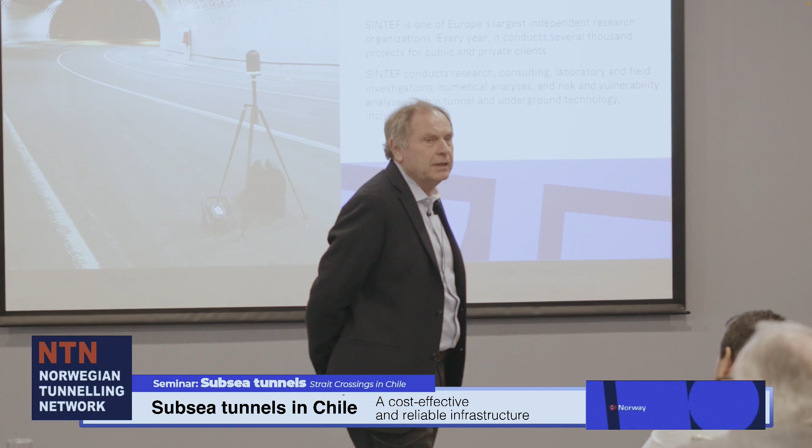Good morning, everybody. Thanks a lot, Matthias. SINTEF is actually a research company, a foundation. It was established 75 years ago, and we are celebrating this event these days. It was established because some professors at the university in Trondheim thought it would be favorable to have a unit only related to applied and industrial research, whilst the university should maintain responsibility for basic research and education. So these two entities have been going in parallel for 75 years.

A lot of people, like myself, have their main position at SINTEF and have had an adjunct professorship at the university. And that goes for a lot of people.

We are about 2,200 people working in SINTEF today, covering basically every topic that you can imagine related to natural sciences.

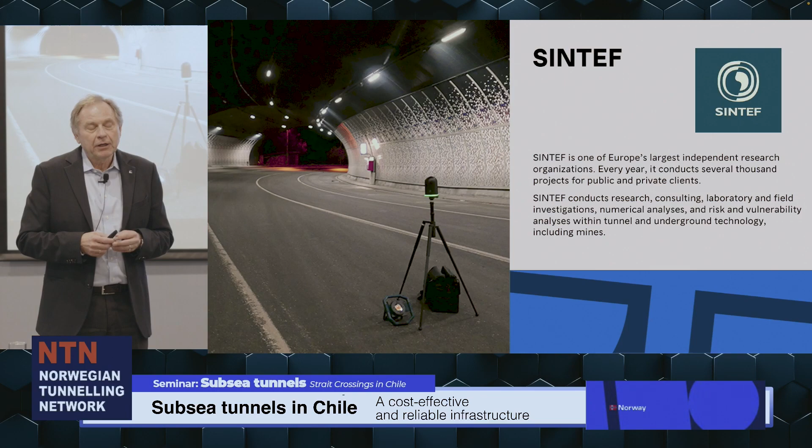But we are not a design company, so our contribution to subsea tunnel projects is through positions as technical advisors to the owners, basically. That is how we have been involved in a number of different subsea road tunnels in Norway as well as globally around the world. So I will come back to that during my presentation.

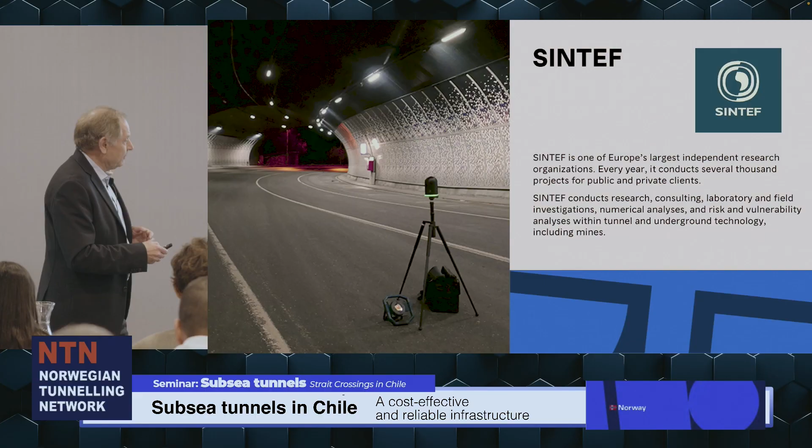I graduated back in 1983, so I have been more than 40 years in this tunneling business. I'm officially retired, but I do these kind of things that we are doing now because I think this is really, really fun.

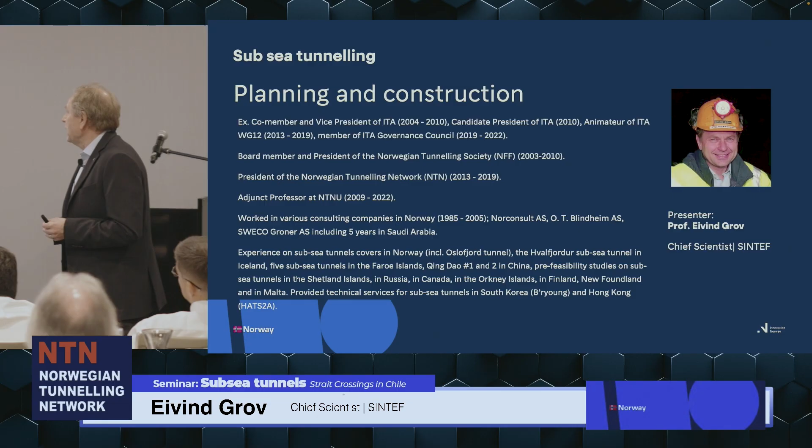I have had a lot of positions within societies like yourself, the Norwegian Tunneling Society. I've been president in that organization. I've also been vice president of the International Tunneling Association, even running for president some time back, but didn't win, unfortunately.

And I've been working with subsea tunnels in a number of different countries. Some have been executed or constructed, and some have been only nice plans for the shelves.

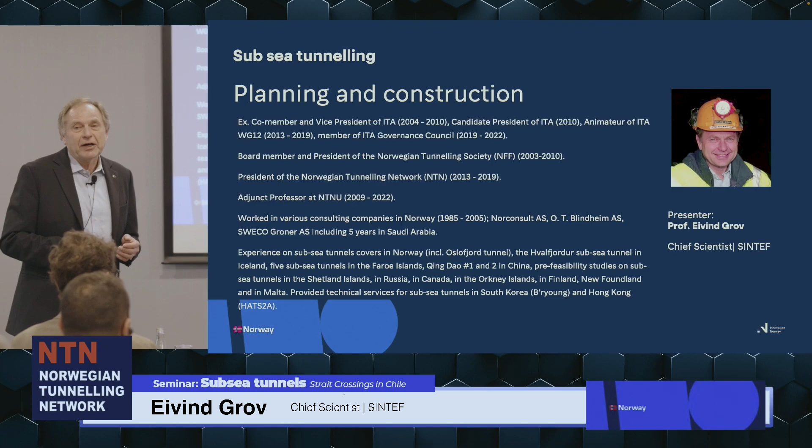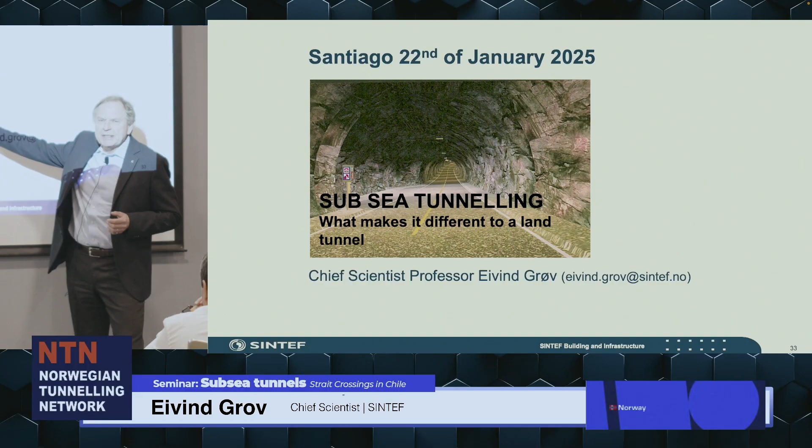So I will talk about subsea tunneling. I will try to focus on what makes this different to an ordinary land tunnel. That is kind of the approach that I'm taking.

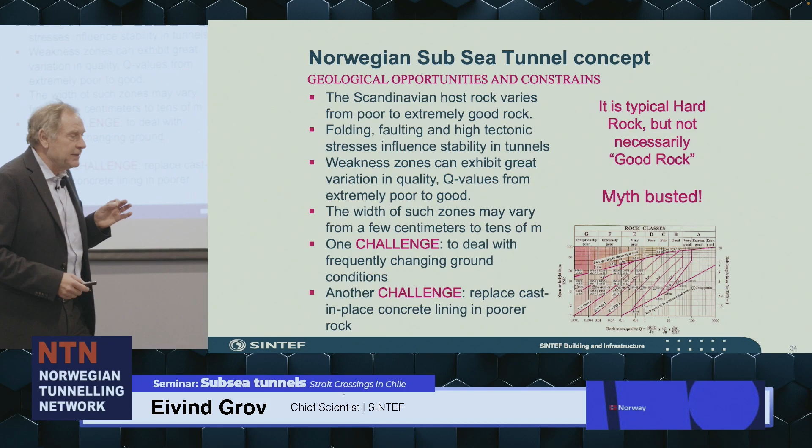But I would like to bust a myth - actually, I could bust two myths. One is that a lot of people tend to believe that Norway is full of money, like Onkel Skrue in Donald Duck - I don't know what you call him in English. But we are not. The second myth is that some people tend to believe that in Norway it's just good rock, excellent rock - you can build whatever you like in caverns and tunnels. That is also a wrong impression.

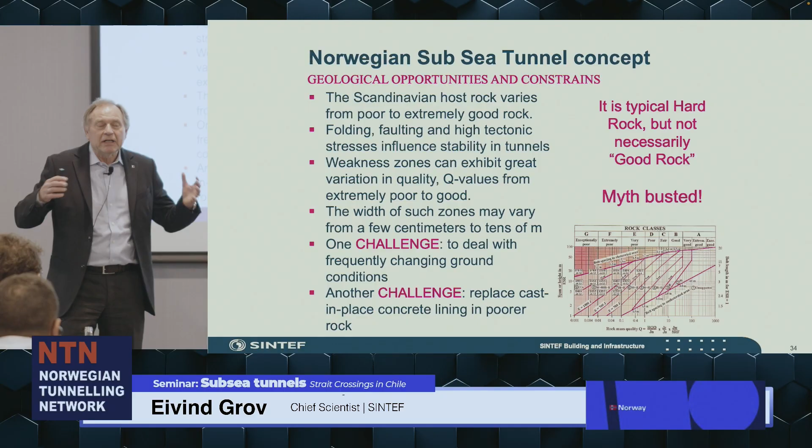We do have good rock, yes we do. We do have hard rock, yes, but we have a lot of mixed rock conditions, which is due to the fact that folding and faulting and high tectonic stresses are influencing what we have as a construction material today.

But we have learned that when we consider the rock mass as a construction material, and we take the benefit out of the excellent properties this material can have, while still being aware that there could be a lot of fault zones, a lot of poor quality rock, and so on - we have something that we can utilize for a number of different applications.

Building large caverns like you saw, the Stad Ship Tunnel, or large caverns like Gjøvik Hall, long tunnels, and so on and so forth. Did I bust that myth? Is that okay with you now? It's not only excellent, fantastic, good rock - it's a lot of different rock mass qualities that we have to face, and we have to face it also when we are going forward with subsea tunnels.

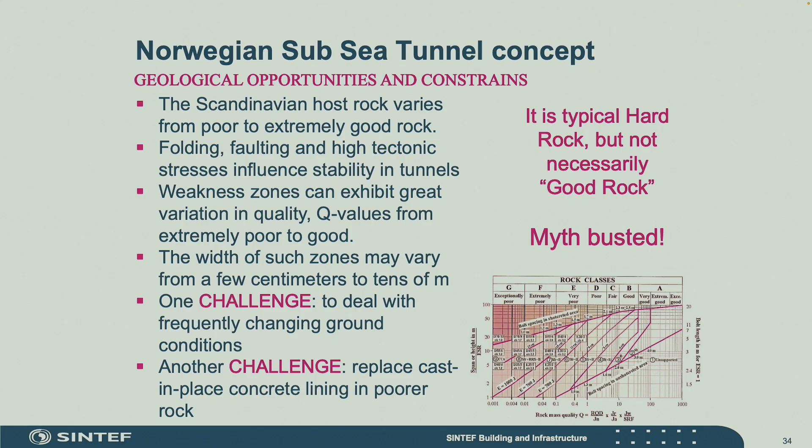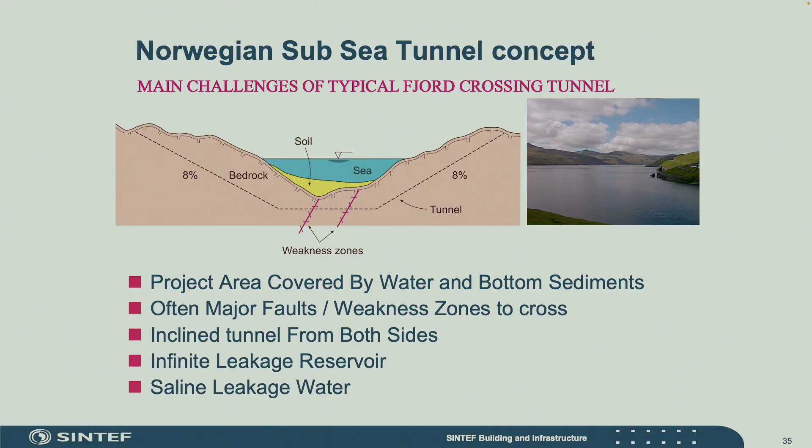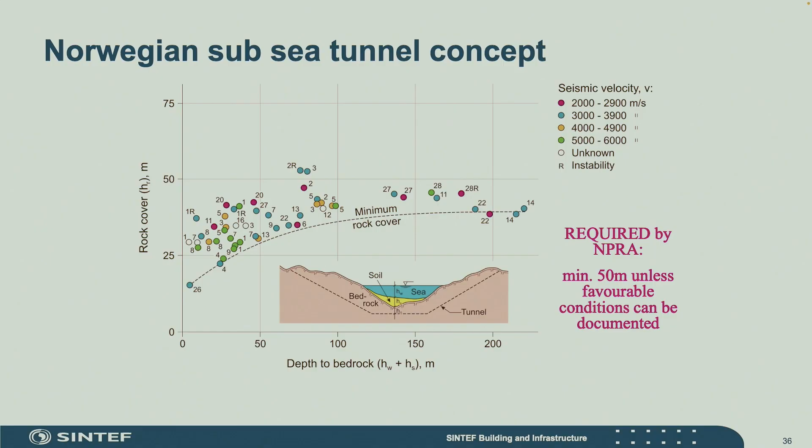Minimum rock cover is a critical factor. We do have to do certain investigations, and many of these are things you know from before, from doing tunnels on land. The main thing is that we have to assess the geological risk, and we will come back to that later on. But we also know from tunneling in general that it is not viable at all to try to minimize or reduce the risk to zero. No matter what kind of tunnel you are building, that is not possible.

That's not viable at all. Then you would have to build one tunnel to investigate for the tunnel you are going to build, where you built the tunnel. And that doesn't really work. This goes, of course, for subsea tunnels also. But what we have to do is be able to identify and manage these risks properly, and that goes even further for subsea tunnels compared to a land tunnel.

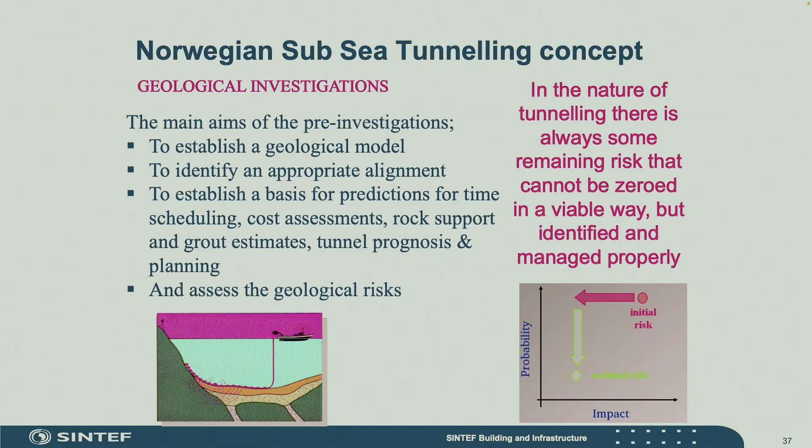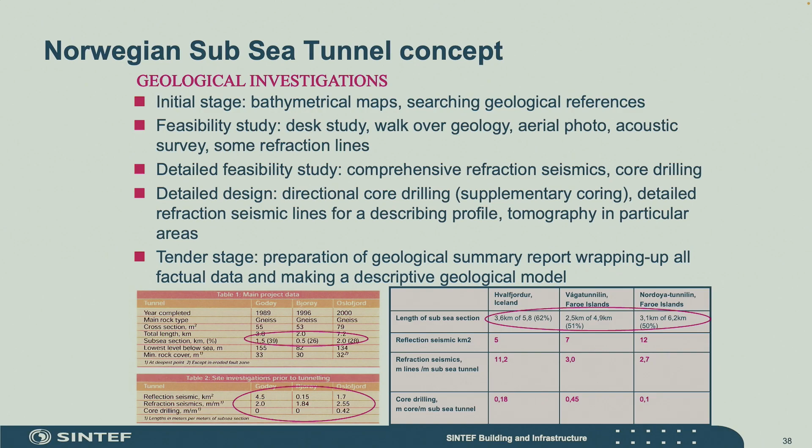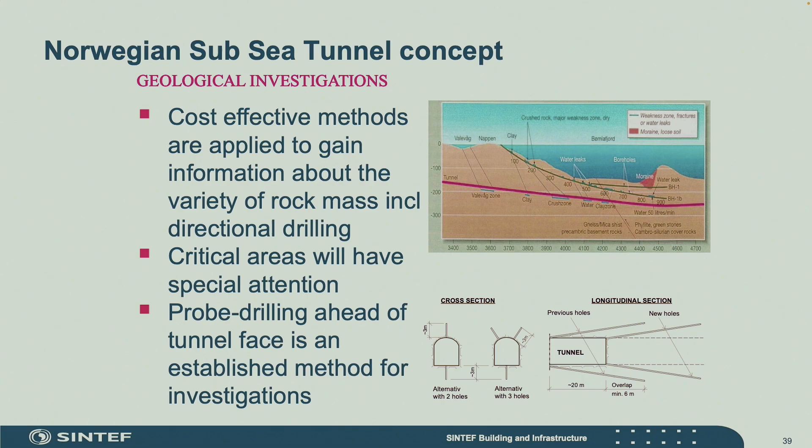This picture is from a project called Bømlafjord, south of Bergen. This is the expected or planned tunnel alignment.

There was an expectation that something could be hiding in this area. So they did a core hole, and what they actually met was some moraine in the core hole. They pulled back the core bit and restarted the core drilling to a lower level, and then they saw that we are lowering the core hole and avoiding this unfortunate situation. The consequence was that the tunnel alignment was also lowered slightly. So that is a way that we are doing directional core drilling, to be sure that we are placing the tunnel at the given level where we are not interfering with weak zones, which could go deep.

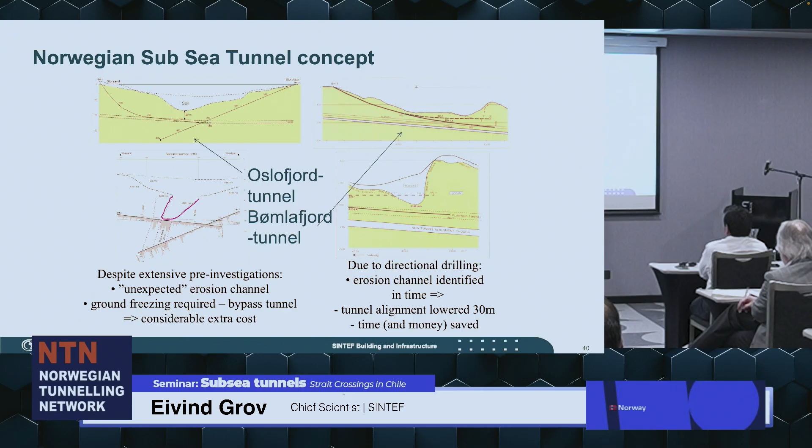There is one picture here from the Oslofjord tunnel. This is actually the reason why we are doing this procedure today. When we were planning the Oslofjord tunnel, we had the tunnel level here, and we had two core drillings. One was directional drilled and one was straight. They were located basically at the level of the planned tunnel.

Unfortunately, in this area the soil was actually going deeper than what we expected. So when they came to this location with the tunnel itself, based on drilling probe holes ahead of the tunnel face, they discovered that it's not rock ahead of us, it's basically soil material. So they stopped the tunnel excavation.

They made a bypass on a deeper level, and then they had to freeze this zone to be able to go through it later on. From that time on, we have always put the directional drill hole below the tunnel level to ensure that we are not repeating that mistake, because that was a costly mistake.

But thanks to the people who were actually doing the probing ahead of the tunnel face, and those who recognized that this was going to be a zone we could not just go through with ordinary excavation, they stopped the construction and decided to do the bypass. If they had just gone into that with an open tunnel face, that could have been a big disaster.

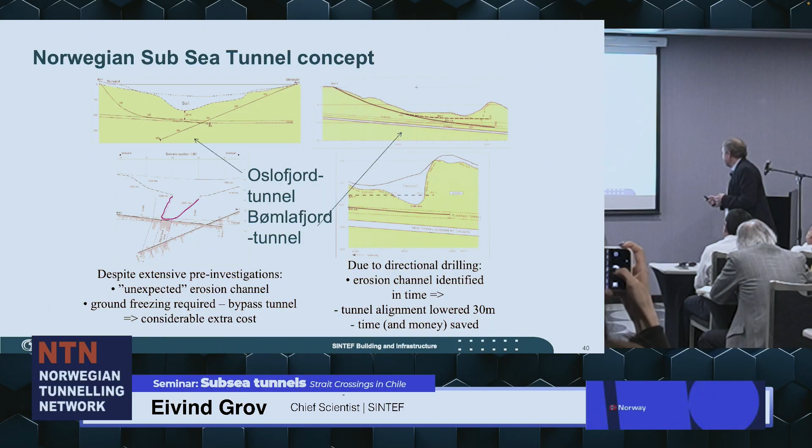We have a risk-sharing principle in Norway, and this also applies to subsea tunnels. It basically means there is a lot of risk on the contractor and a lot of risk on the owner, but it's fair and square shared. The owner carries the risk for the rock mass conditions, because the owner is also the owner of the rock mass, as the owner has decided where we're going to build the tunnel and what pre-investigation methods to use up front. So they have to take this responsibility.

All the information gathered is disclosed to the tendering companies. The contractor has to carry the risk related to whether he is able to do the work within the time, methods, and means expected. He has to have equipment, manning, and has to gear up his site to be able to carry out the work in accordance with what has been given in the tender documents.

We have a beauty in this concept called the equivalent time system, which means that depending on the amount of rock bolts, sprayed concrete, and things like that being done, if it's more than in the contract or the bill of quantities, you will have an extension of time calculated using the standard capacity in the equivalent time system. So that's a time-regulating method.

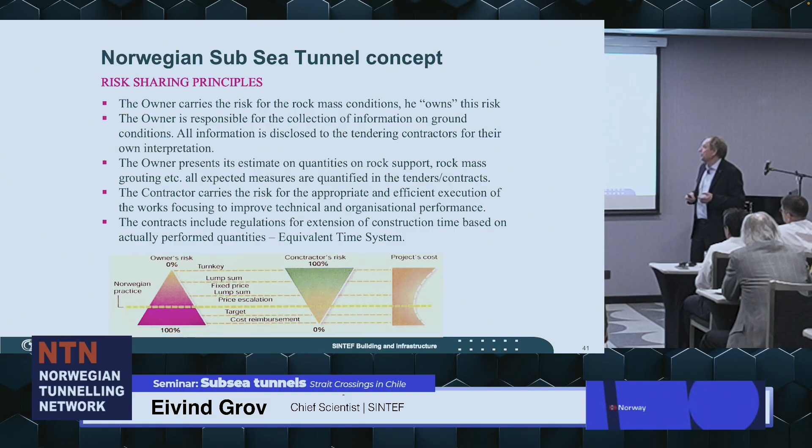Some of the risk with assessing the amount of rock bolt, spray concrete and so on is on the owner itself, because he has to estimate these quantities, and the estimation shall be based on the best knowledge at the time it is being done. So there is no tactic in this, there shall not be any tactics in this.

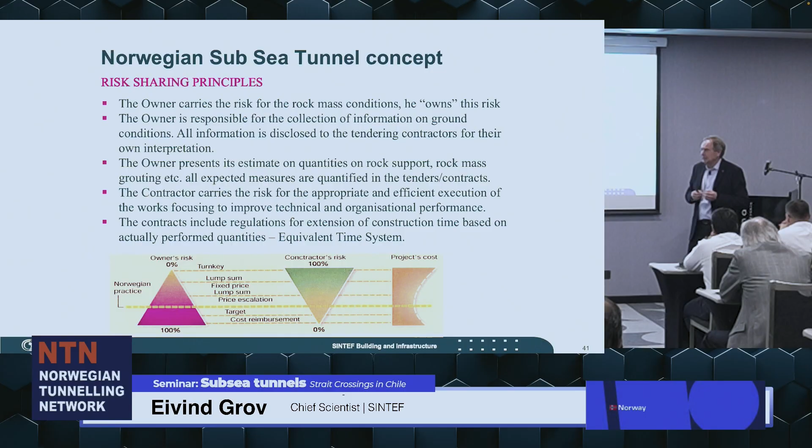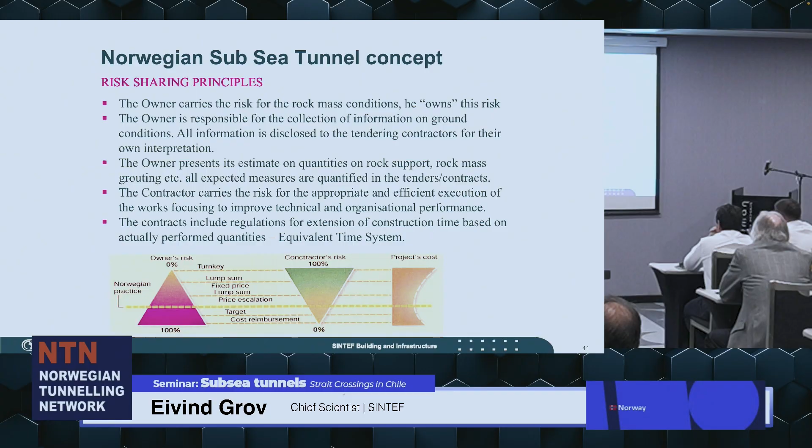With this system we claim that the Norwegian practice will give us an optimum price and a minimum price, maybe you can say. If you have little risk on the owner, or in a turnkey project zero risk on the owner, the contractor has to take the risk, and you have to pay the contractor for taking this risk. On the opposite, if the owner is taking all the risk and nothing on the contractor, it will also give you a high price. So a balance between the risk taking will give you an optimum price.

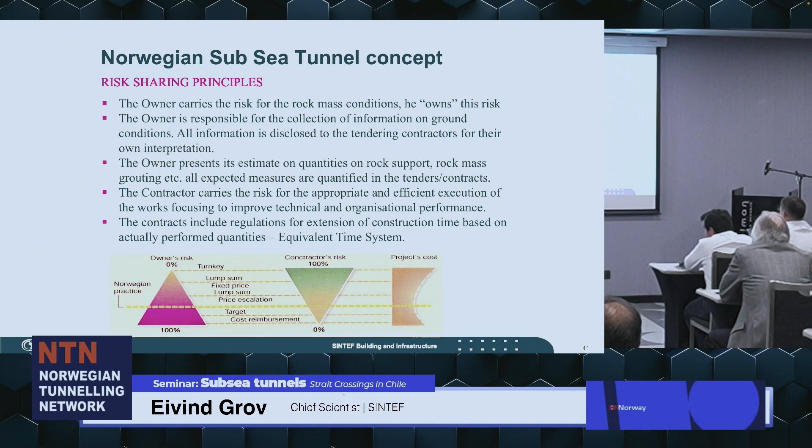It is important that all the expected items are quantified, and quantified in a fair way based on the information the owner has at the time he is making his calculations. The contractor is reimbursed according to the tendered unit price, and these tendered unit prices stay valid throughout the contract period, just being adjusted for inflation.

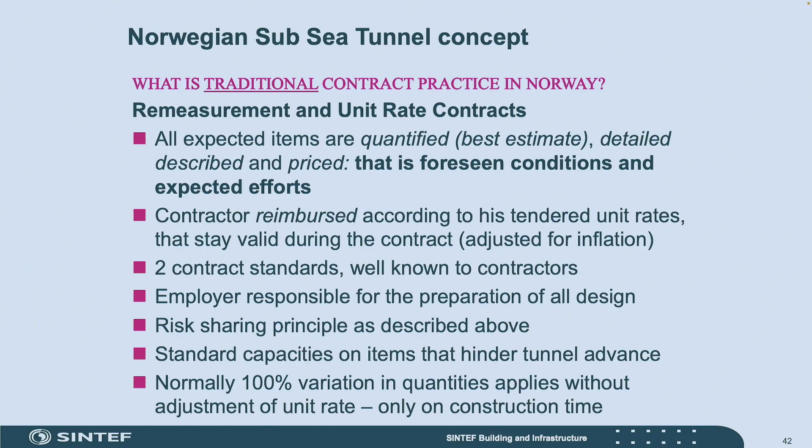I think we have touched base on most of this. We may say that in a tunneling contract we have foreseen geological conditions and expected conditions, and these can be handled by the means and measures that are in the contract itself. If truly unforeseen conditions occur, then we are in a different sphere, because if they occur, the unit rate contract does not provide a magical solution to it.

But a fixed price contract does not provide a magical solution either. In that case, the success of the contract will only depend on how good the two parties are in negotiating a fair and square solution for the problem.

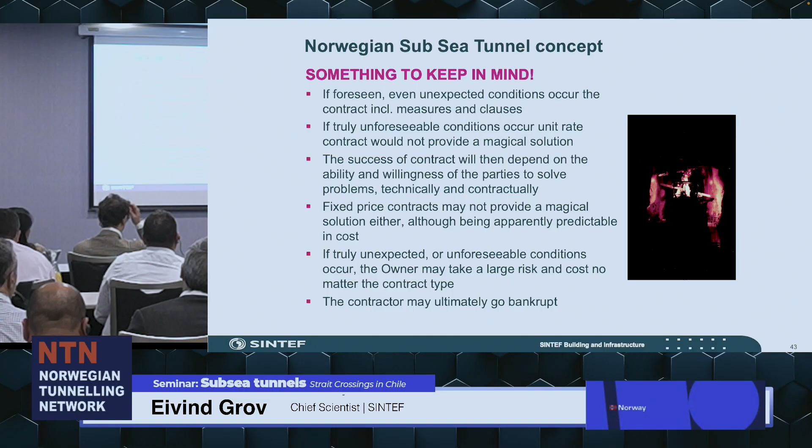The owner in this kind of situation may take a high risk, because playing the game too hard could lead to the contractor ultimately going bankrupt, and then the owner is taking over the whole responsibility and the whole risk of the situation. That's not a good situation either. So it's important that we are able to share the risk between the parties in a fair and square way.

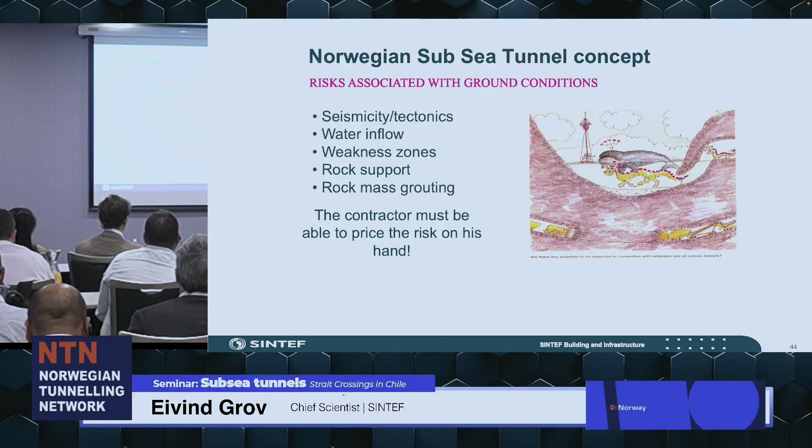When it comes to risks associated with ground conditions, seismicity and tectonics have been mentioned already. We have water inflow, weakness zones, rock support, rock mass grouting. The most important thing is that whenever we present a tender document in the tendering phase, the contractor must be able to price the risk which is on his hand.

We should not put it into a wrapping or disguise the risks, because that will ultimately lead to a situation where the contractor is not able to price the risk.

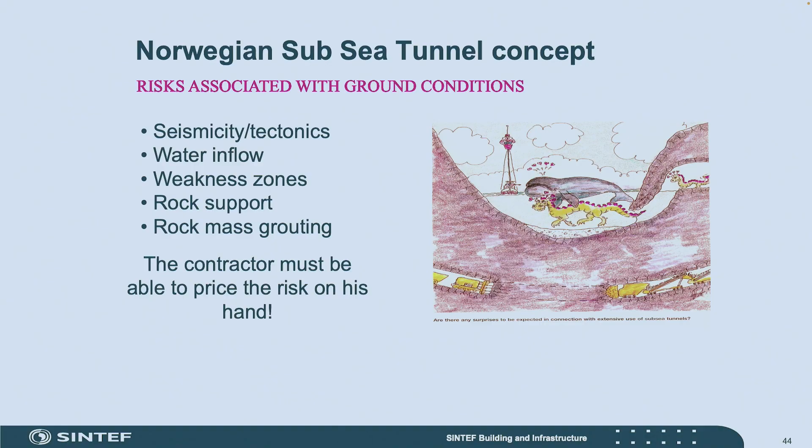We have had some situations where things didn't go exactly as we wanted. One of them is a tunnel called Ellingsøy Tunnel, going back to the late 80s. In this location we had a rock cover of 45 meters, a water depth of approximately 70 meters, and we encountered a fault zone with clay and lots of seepage.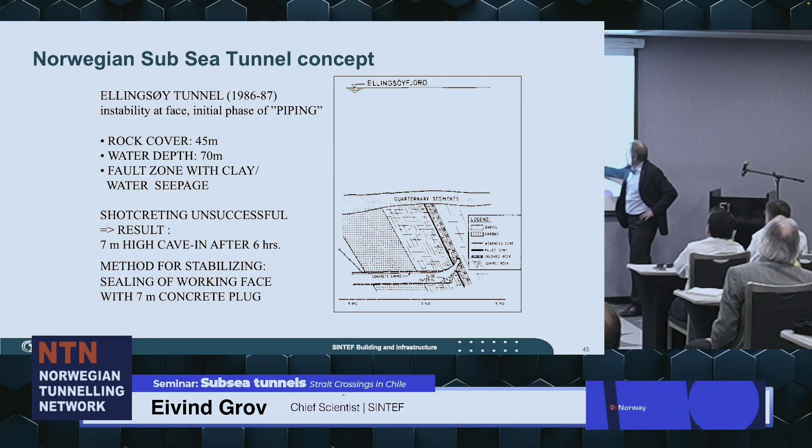So what happened was that piping actually developed, and this was approximately a 7 meter high cave-in after 6 hours.

What had to be done was to try to stabilize. We had to seal off the working face and place a concrete plug at the face itself to stabilize it. And then, once the face was stabilized, we had to do preventive measures, with spiling and things like that, to be able to go through this.

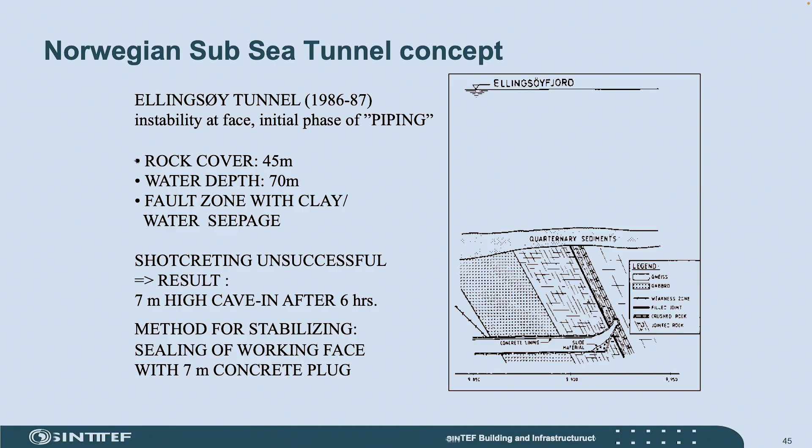This was actually the first fixed price subsea tunnel project ever being built in Norway. Skanska, or Selmer as it was called at that time, was very eager to do this. It's not a very long tunnel, but what they encountered in this particular project was a fault zone with sandy material.

Very high permeability.

And what they had to do was a lot of comprehensive grouting. They even used tube á manchette to be able to actually grout some of the material in front of the tunnel. Spiling bolts, rock bolts, shotcrete, and going through the secured zone with reduced blast lengths to be able to do it. And they had to use shotcrete arches, or what we call today reinforced shotcrete ribs, which you can find in the Q system, for example.

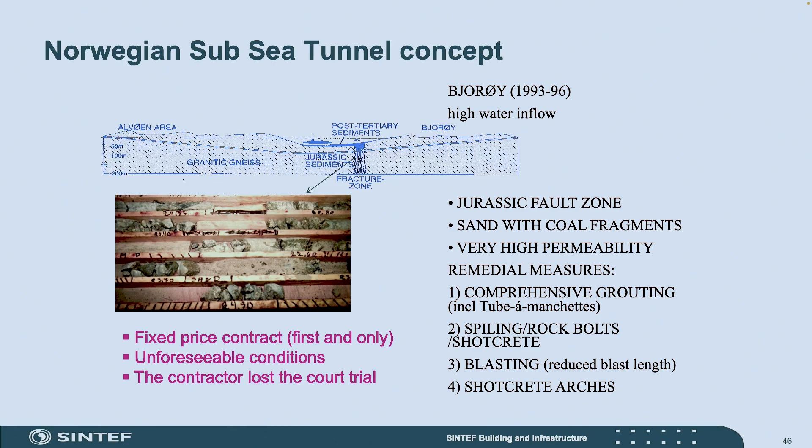Another one was more recent. This is the Atlanterhavs tunnel. They were almost at the deepest point in the tunnel, almost reaching down to the bottom. Then they entered into a fault zone. High water inflow, high pressure, you can see. Now, there is no... it's 230 meters below sea level. 230 meters, theoretically, waterhead in that location.

So they had a face collapse. They had to cast a concrete plug. You can see the rock bolts here from the instability. So they had to block off that face, cast a concrete plug, and then start again to do short rounds with extensive rock support when moving forward. This took considerably a lot of time, one year to actually get through that location totally.

But insofar, we have always been able to mitigate the situation and to complete the tunnel construction to a final tunnel. We have never ever abandoned any of these subsea tunnels in Norway.

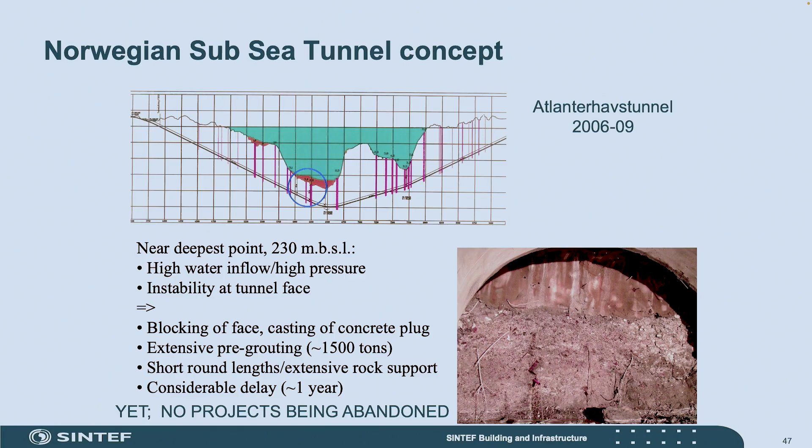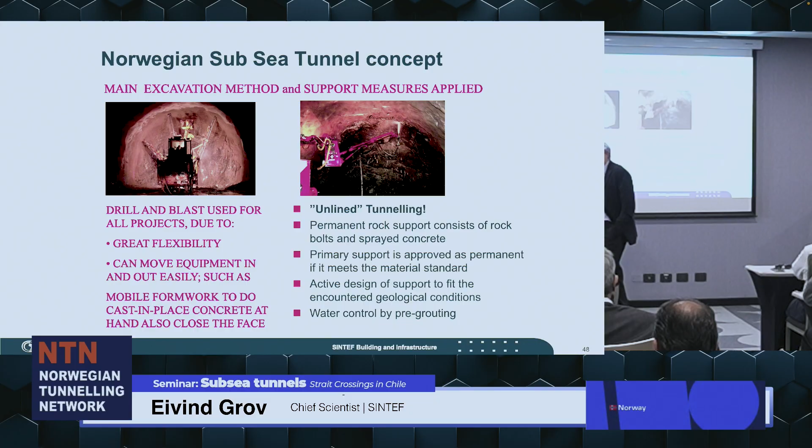We have always been using drill and blast. For the Rogfast project, we made a study where we tried to convince the owner that he should look at the possibility of doing the tunnel with a TBM, because we were thinking that a TBM with EPB facilities or double shield and things like that could be a possible solution, but that was abandoned. And that is the only project where a TBM has been looked at.

And the reason why we are sort of hanging on with this drill and blast method is that it provides a great deal of flexibility. We have the possibility to go in with other equipment, other types of equipment, and the fact that at the site we shall always have a mobile formwork to do cast-in-place concrete as a measure if things go wrong. And if you have a TBM, that may be a problem to do so. So that's why we basically have used the drill and blast method.

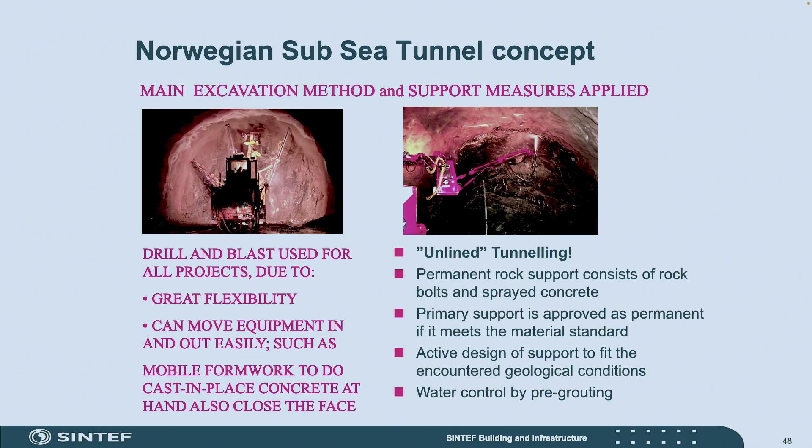I'll skip this, it's a little bit old, but we are basically using ordinary rock bolts and sprayed concrete as rock support. Today, there are regulations in the handbook or guidelines from the Public Roads Administration on the minimum thickness and things like that, but this is basically what we are using. Only on rare occasions has there been a need of cast-in-place concrete lining.

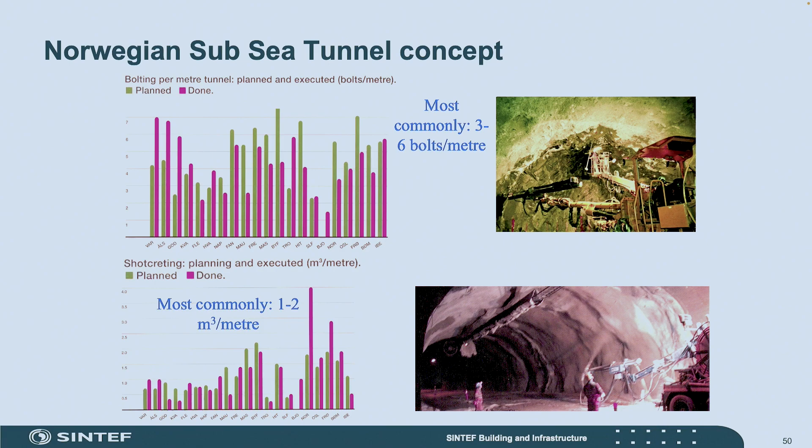Oh shit, wrong direction.

As I said, water inflow is a risk element in subsea tunnels. There is a maximum requirement on inflow, which is today 30 liters per minute per 100 meters. And that is also the dimensioning criteria for the pump and the pumping system and the drainage system in the tunnel.

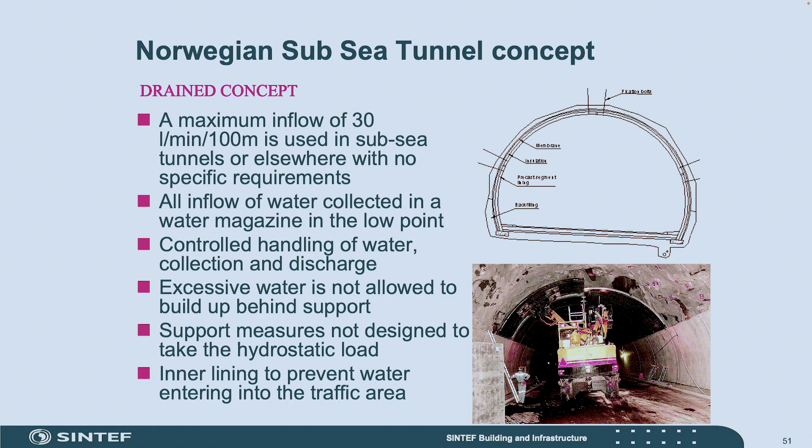Because in both land tunnels and subsea tunnels in Norway, we actually allow water to enter the tunnel, but we take the water out in a controlled manner. And for a subsea tunnel, which has a low point, it means that all the water which goes in has to end up at the low point, and at the low point, we will have a pumping station and a water magazine.

This is kind of a rather large construction element in the tunnel itself. It should be able to store water for either 24 hours or 48 hours of steady inflow of 30 liters per minute - not over the total length, how to explain that - 30 liters per minute per 100 meters for all the meters on both sides of the pumping sump.

So in case of an electrical failure, so that these pumps which are sitting here fall out of operation, the water magazine shall be able to cater for the inflow in 24 hours or 48 hours. And that is sometimes a quite considerable amount of water.

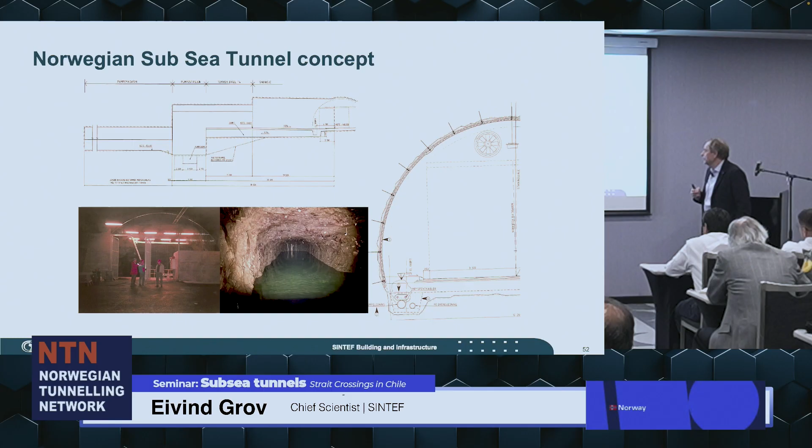From this pumping sump, it will be pumped to one of the sides for deployment, but there is a redundancy, which means that the pumping system should also be able to pump to the other side in case there is something wrong. So there is a redundancy in the system when it comes to the pumping, because this is really crucial for the operation of the tunnel itself.

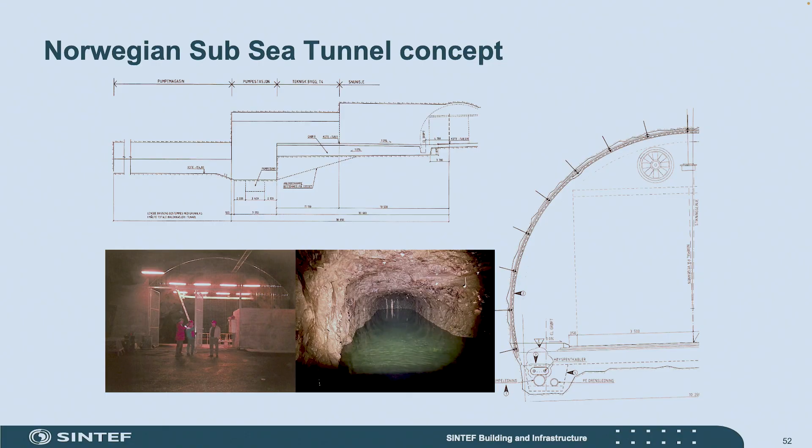We rely heavily on what we call pre-excavation grouting, or pre-grouting. That is something which is mandatory to have established for a subsea tunnel. We do it also for ordinary land tunnels, but for a subsea tunnel it's even more restrictive to have this in place.

In many places around the world, people talk about post-grouting. We have abandoned that idea. We say that rock mass grouting shall be done as pre-excavation grouting.

And in a subsea tunnel, it's mandatory to have a system for probe drilling ahead of the tunnel face. Probe drilling ahead of the tunnel face would delay the excavation process slightly, but that is the first-hand information that we will have when we are doing the excavation work or construction works. Leaving that out is like lowering your guard totally.

The probe drilling is something that we, if we expect good rock mass conditions, can go down to 2 or 3 or 4 or 5 holes in the probe drilling. If we do expect adverse ground conditions, we will increase the number, and we will decrease the length between each probe drilling round.

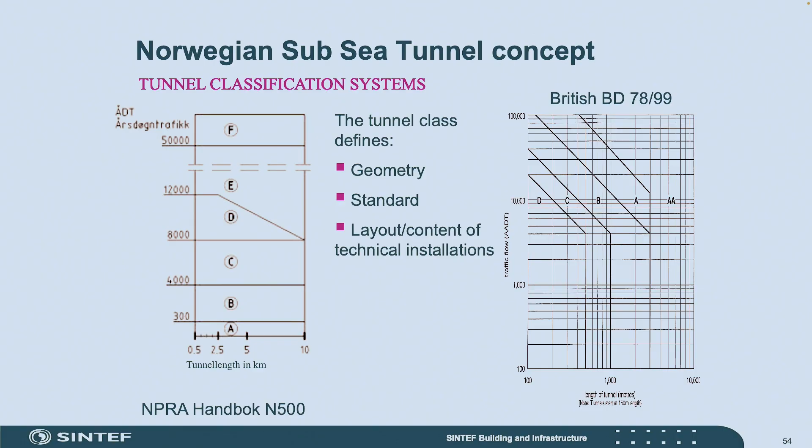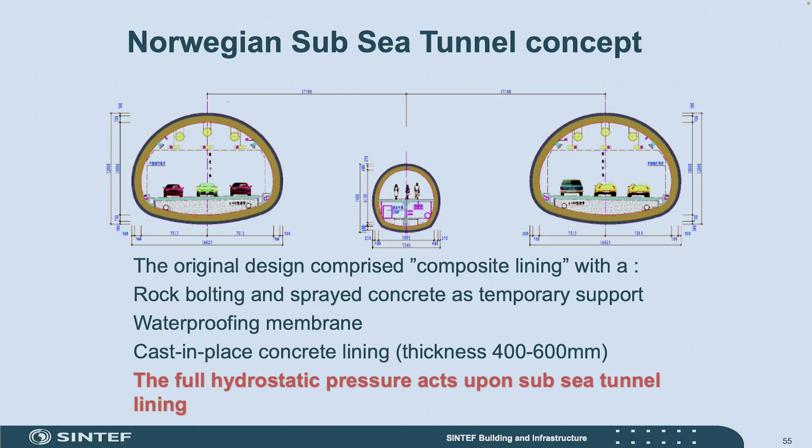So exporting subsea tunnel concepts is interesting. Some years ago, we were in Qingdao in China, and they had established this type of system: 2 main tunnels and a service tunnel, being excavated using ordinary drill and blast in rock mass ground conditions not far away from what we are used to in Norway. But they have a thick cast-in-place concrete lining for all 3 parallel tunnels, and we tried as best as we could to convince them that this is not necessarily best for a safe tunnel excavation and operation.

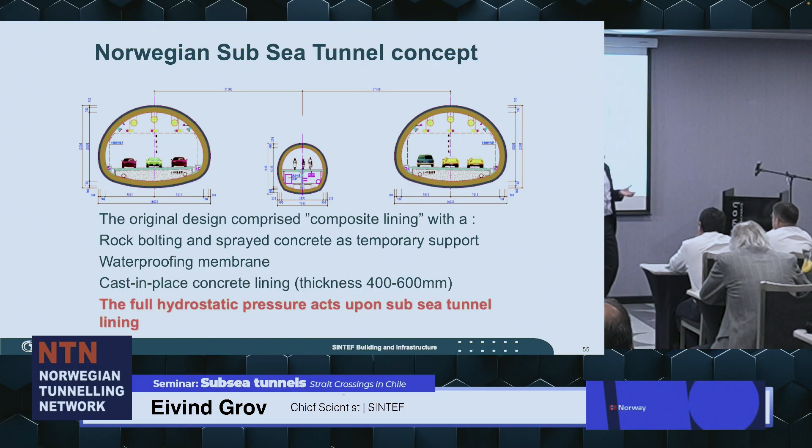Because what you actually do is you increase the loading on these structures. So the tunnel has to be designed with full hydrostatic pressure acting on these structures. So we suggested, and we did a lot of numerical models, referring to experience in Norway and so on and so forth.

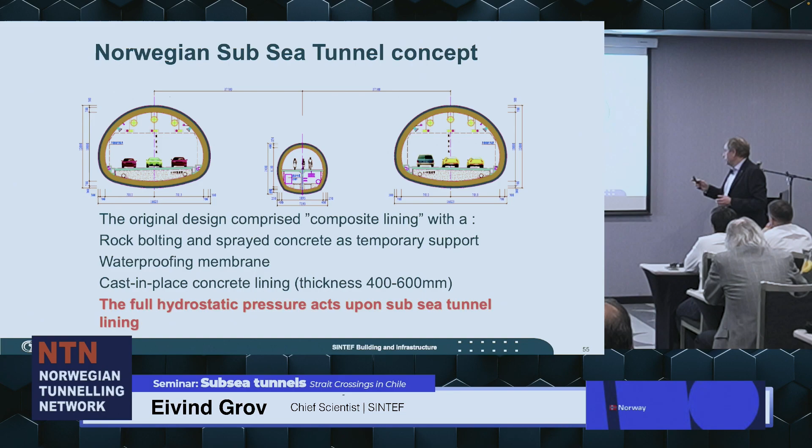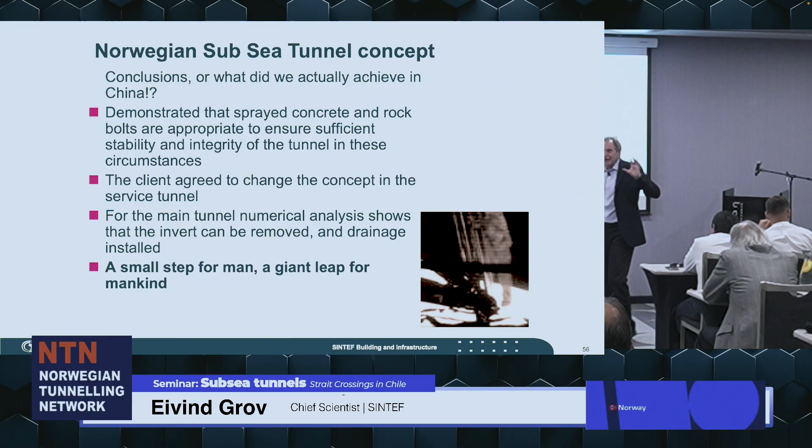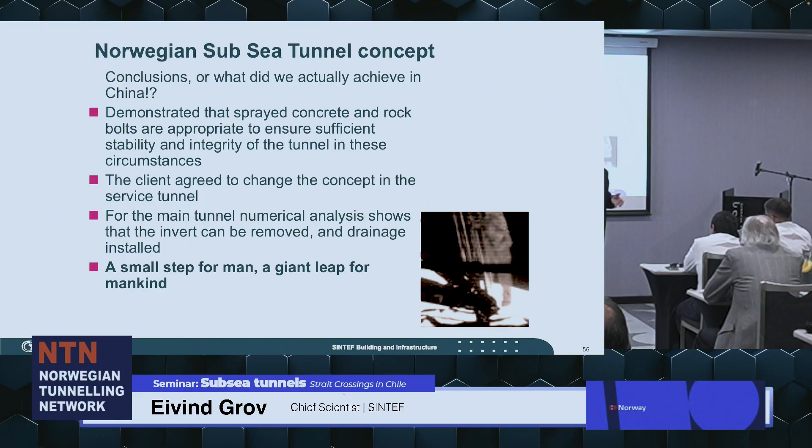What was the outcome? We were able to take away, they were listening to us, they took away the lining for the central small tunnel, and kept it for the big tunnels on the side. We didn't really win the game, but at least we managed to do something. I call it a small step for man, a giant leap for mankind. So there's hope to be even stronger in trying to convince people that we have the possibility to do this in a much more, let's say, cost-effective way than many do.

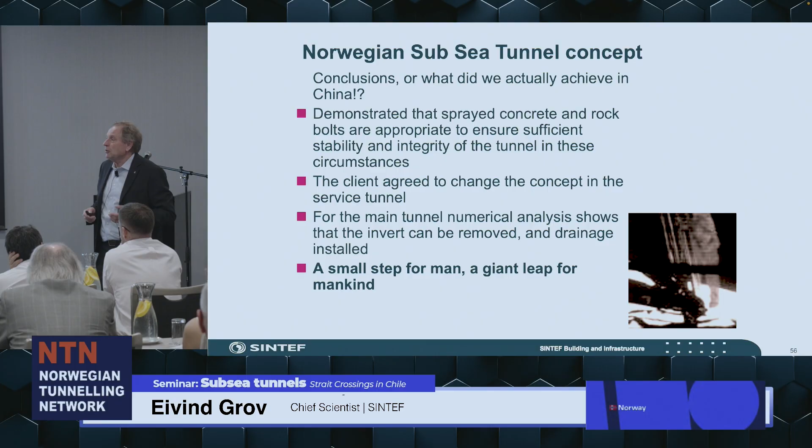So if we go to some locations outside of Norway, since Arild Petter is very focused on the west coast of Norway, where he is living, I'm focusing very much on Trondheim, where I'm living. In Reykjavik, which is almost at the same latitude as Trondheim, we were involved in a subsea tunnel some years ago, the Hvalfjordur tunnel. I'll show you some pictures from it.

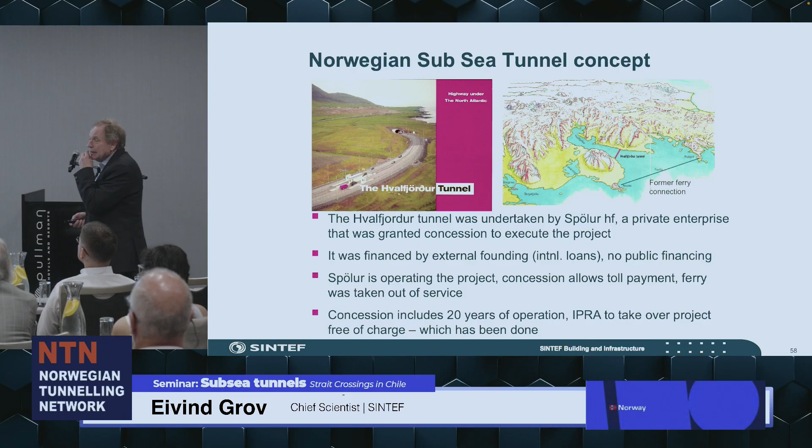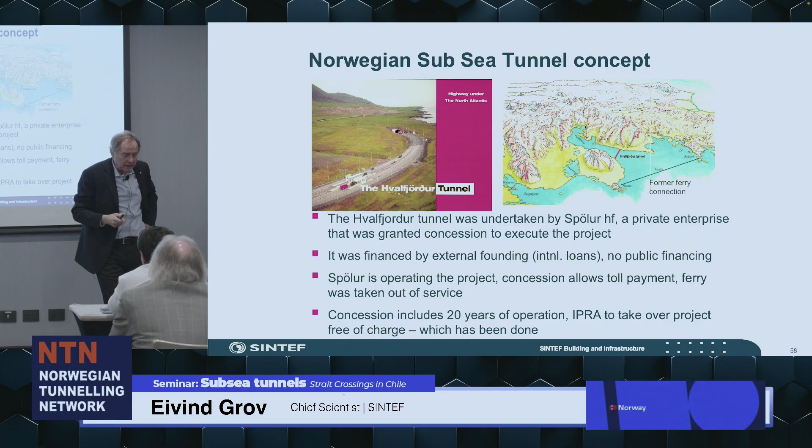The Hvalfjordur tunnel is located outside Reykjavik. This is Reykjavik, and here is the Hvalfjordur tunnel. This used to be a ferry connection, and you could also go around the fjord, but this tunnel would cut the distance for all the facilities on the western part of Iceland.

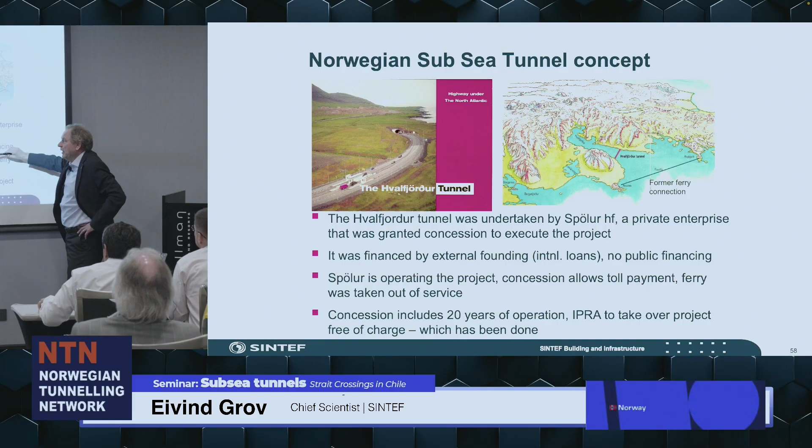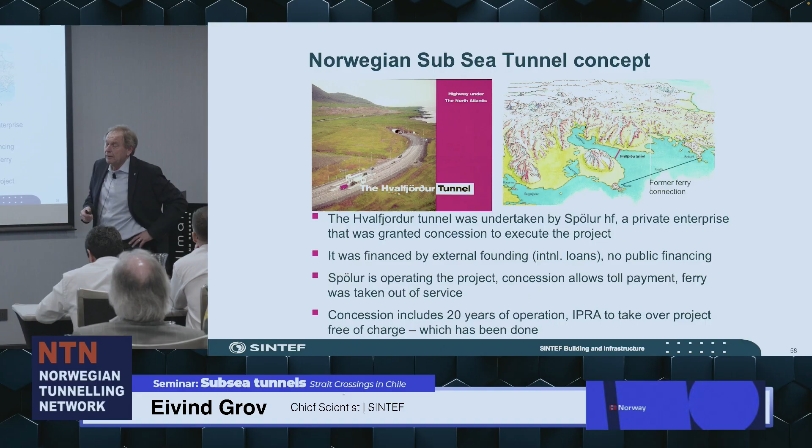The tunnel was undertaken by a private company, a private enterprise. It was financed by external funding, no public financing whatsoever, and Spölur operated the tunnel for 20 years. Today it's operated by the Public Roads Administration in Iceland.

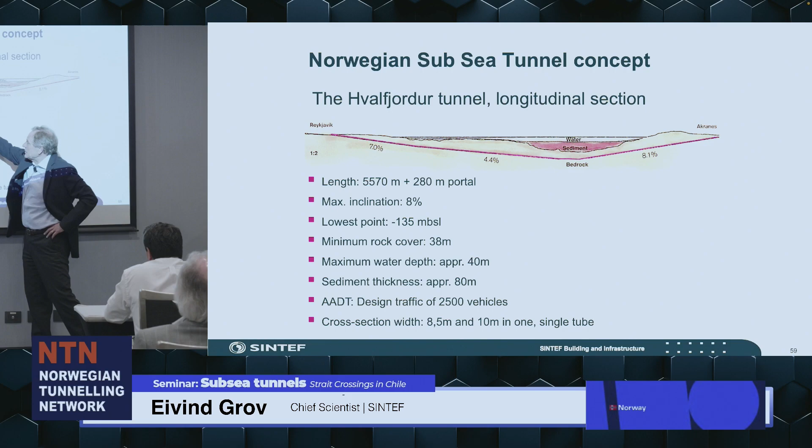This is the longitudinal section of the tunnel. You can see we had an inclination of 8% here, which would not have been allowed today. It's almost 6 kilometers of length. We have a minimum rock cover of 38 meters and 40 meters waterhead here.

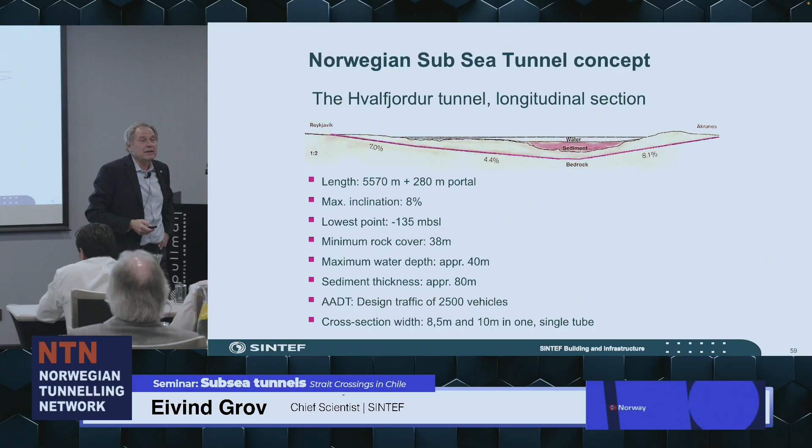The interesting thing, for those of you who know Iceland, we were talking about seismicity. This is a location where seismic events take place. I'm not saying daily, but very, very often, very frequent. We know that Iceland is cut by the Mid-Atlantic Ridge, and Iceland is still growing because of the rift activity.

The project site is located some 10 to 40 kilometers west of the so-called Reykjanes volcanic zone. So it's quite active, and you have probably seen news flashes from Iceland where you see volcanics flowing on the surface of the country. This is actually prone to active seismic activities.

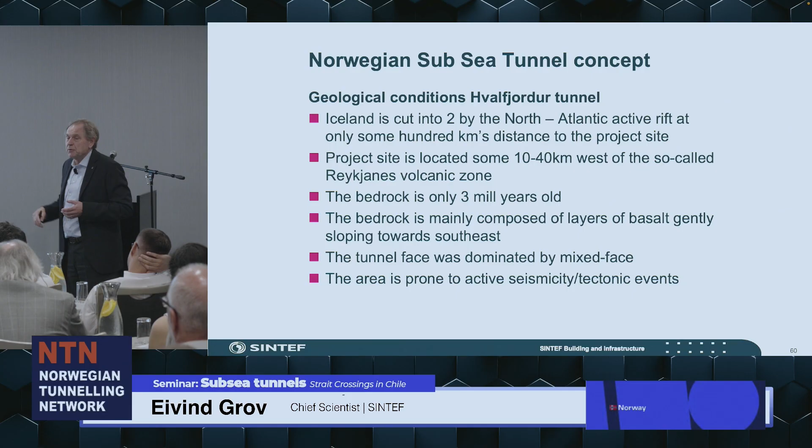We did a risk analysis before the construction work started, looking at all sorts of events: 50 years, 100 years, 1,000 years, 5,000 years return period. We ended up with the conclusion that we should design for the 50-year seismic event. That is something we had the possibility to cope with. If you go further to 1,000 or 5,000 years, you have to do things that are not viable for a tunnel project.

In Iceland, the media was on top of us. They called it an engineering fiasco before we even started. That's not very nice to do, to call a project an engineering fiasco.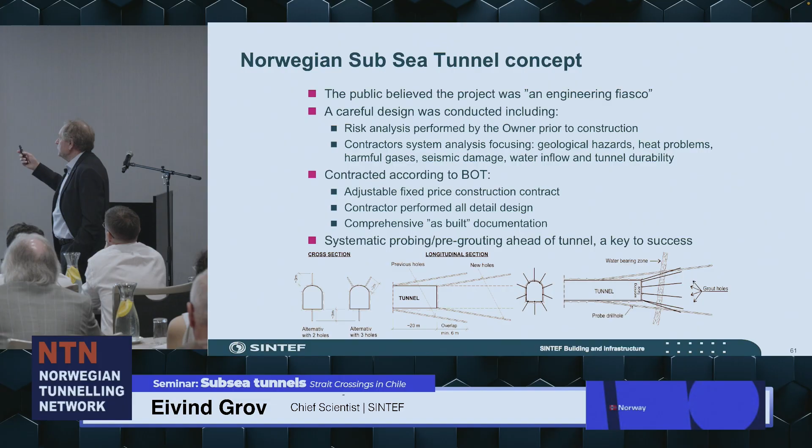As I said, we did a whole lot of risk analysis and things like that. We engaged the contractor on an ordinary build, operate and transfer basis, with an operate and transfer period after 5 years. We used an adjustable fixed price construction contract. The contractor performed all detailed design and comprehensive as-built documentation. What actually came out of that was that it was done in 2 years and 3-4 months, half a year shorter than expected.

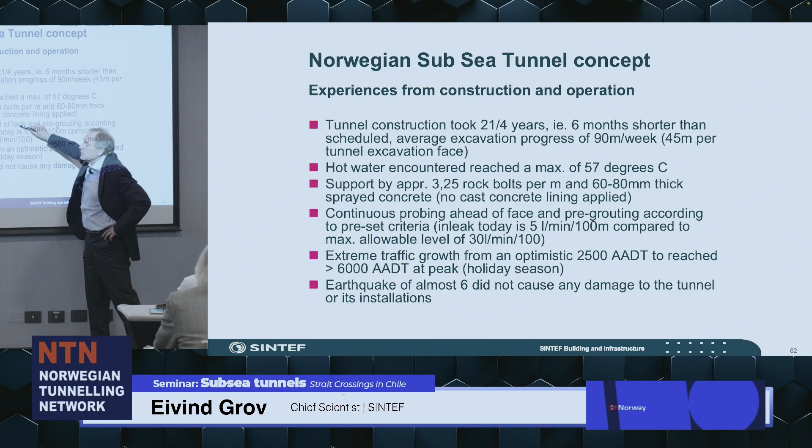We encountered water that reached a temperature of almost 60 degrees Celsius. 60 degrees Celsius with lots of concrete is a challenge. It was supported with ordinary rock bolts and sprayed concrete. The main thing here is also continuous probing ahead of the tunnel face, always.

It was designed for an optimistic 2,500 annual average daily traffic. At the peak, we had more than 6,000 vehicles through that tunnel. The tunnel, which was considered to be an engineering fiasco, was paid back in half the expected time, or something like that.

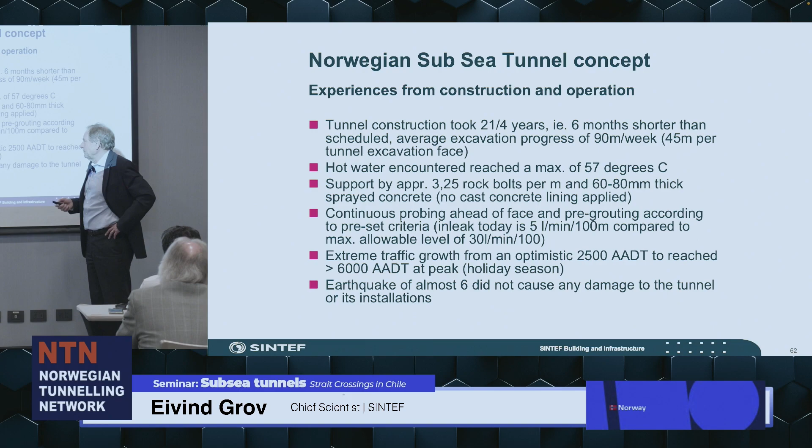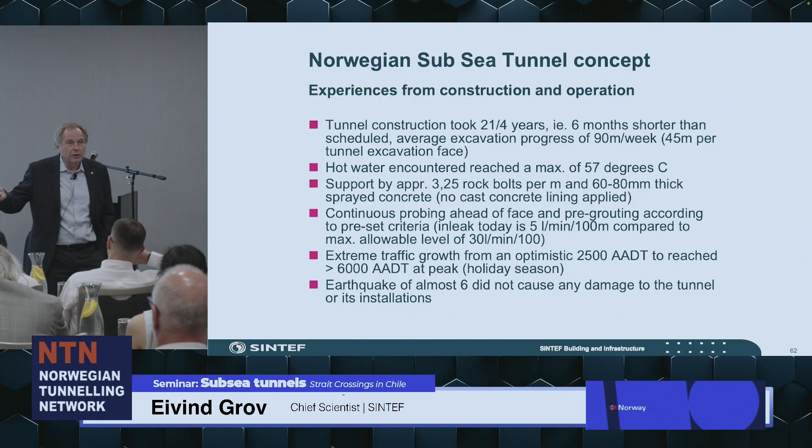We had on one side of the tunnel a station that is actually measuring seismic events. One earthquake reached almost 6 on the Richter scale, and there was no harm to the tunnel. People who were in their cars during the event didn't even notice that an earthquake had taken place.

They were asked, well, did you notice that there was an earthquake? An earthquake? No, not at all. And there was no damage to any of the installations in the project.

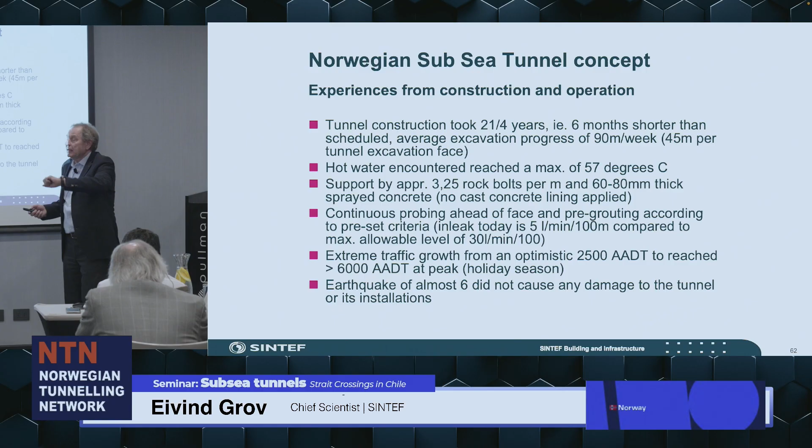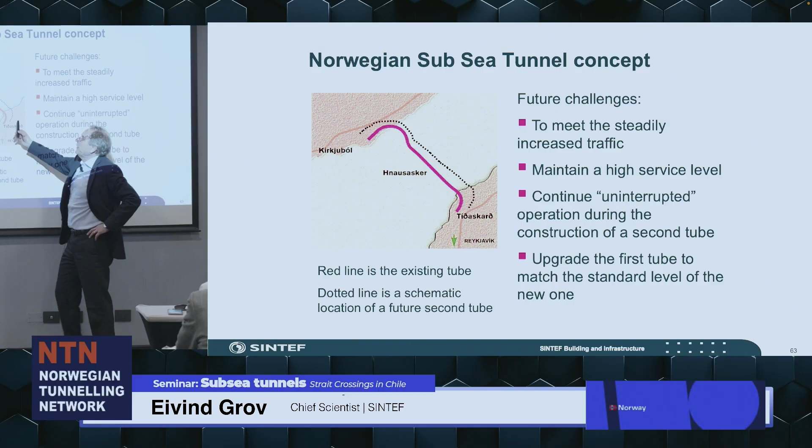Now I'm running a little bit out of time, but this has continued to meet the requirements of the society in Iceland. Now they're looking at making a second tube because the traffic density has increased so significantly.

Then we go to the Faroe Islands. The Faroe Islands is a group of around 20 islands. They used to be connected with ferries between the islands, and people used to spend a day or two when they went visiting friends in the upper part if they lived down in the southern part.

That means that people who are living down here will go the whole way up to the northeast in a couple of hours. That used to take a couple of days earlier with ferries and things like that. So this is an infrastructure revolution.

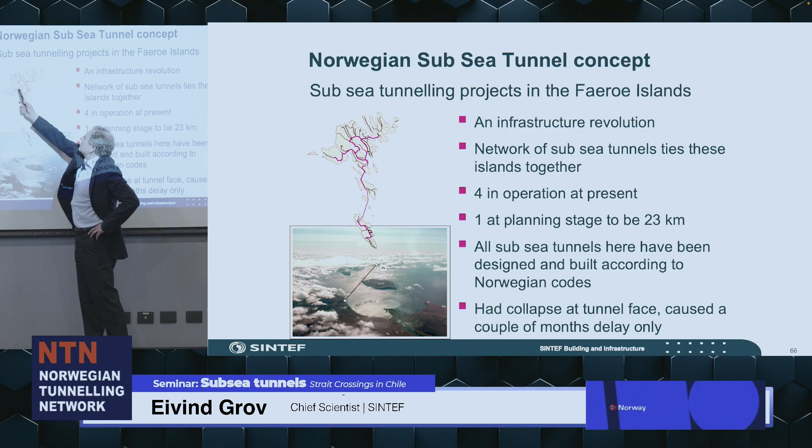These tunnels are almost 5, almost 6, 11, and almost 11 kilometers long. And this one will be 23 kilometers long. I hope I can say when it will be excavated, and not if it will be excavated.

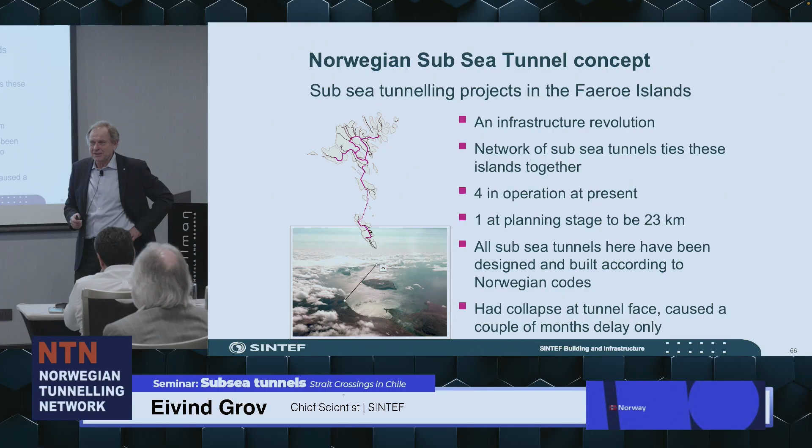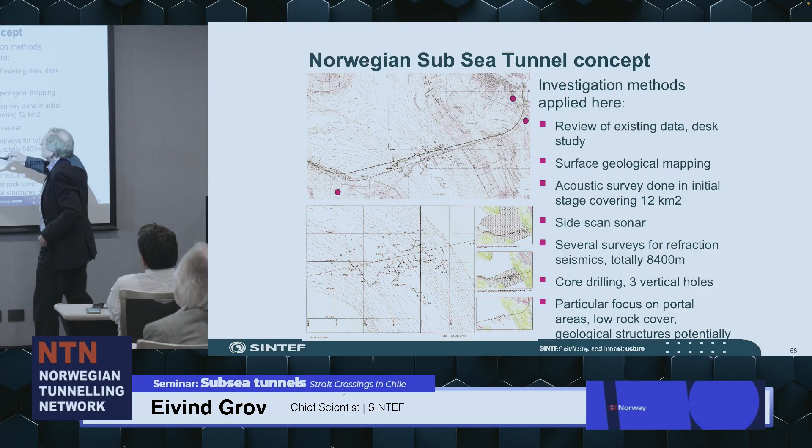There are a lot of different ways available for gaining information about the substrata structures. We often start with acoustic seismic profiling, which means you are able to cover a large area within a very short period of time. That is used to identify the best location for the tunnel, with the lowest water or sea level, and things like that.

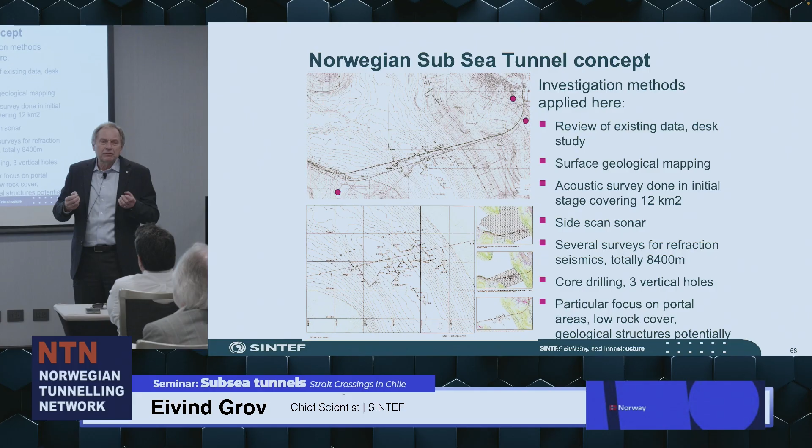When you have fixed the alignment - this is for one particular tunnel project, as we've done here, with some variations but basically along the same route - you do refraction seismic profiles, which involves lowering equipment onto the seafloor and using explosives to capture whether or not there are fault zones or things like that. You also get identification of the rock mass ground conditions in terms of seismic velocities.

And of course, core drilling - we could probably have done a directional core drilling from here, for example, to be able to reach the central part of it.